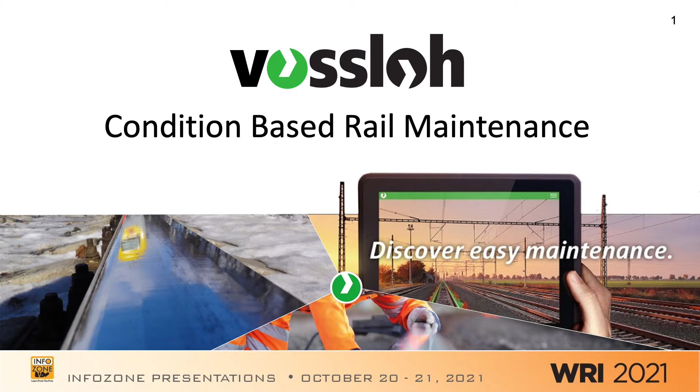When Vossloh presented 2 years ago to the WRI conference, we had some graphics on screen and we talked about the toolbox, the different tools that can be used in different applications and different rail conditions. We are big believers that different tools should be used in different applications. What we have on screen here is very basic. Most people in the room would understand these different technologies through different presentations in the past.

Obviously, the top two, slipstone grinding and conventional grinding, are the ones that have been utilized in North America to the highest degree. When Vossloh goes out on track with any of our operations team or engineers, we like to look at different conditions, and we really think that different tools should be used for different types of rail defects, depending on the track time you might have, the depth of defect, and whether we're trying to remove flaws or just optimize a profile. Different technologies can always be utilized, but they definitely provide different value-add propositions depending on how they're used in different areas.

When we spoke a couple years ago as well, we talked primarily about rail milling. Other companies have made presentations about the different technologies and benefits in other parts of the world that have been widely adopted. We had a game plan to actually roll out milling technology in this market, and in the last 2 years we have been successful in doing so.

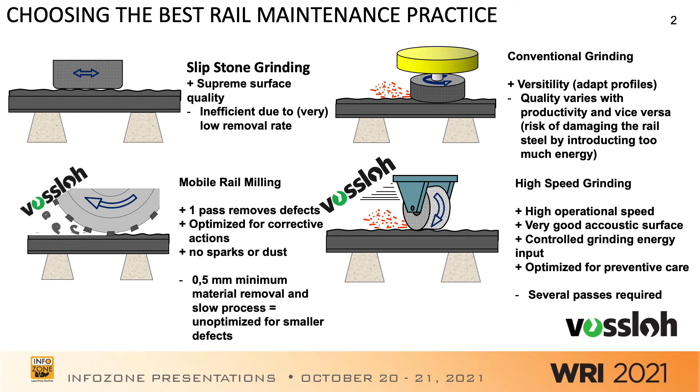What we want to talk about today is we're very aware that conventional grinding has the ability to perform some preventative maintenance. It also has the ability to do some corrective maintenance. We see the place for conventional grinding, but we think there are technologies in the world that add a lot more value when we might want to get ahead of things on a true preventative measure, or in the case of milling, where we actually have defects because we didn't keep up with that maintenance practice, and now we've got to go in and do some corrective action.

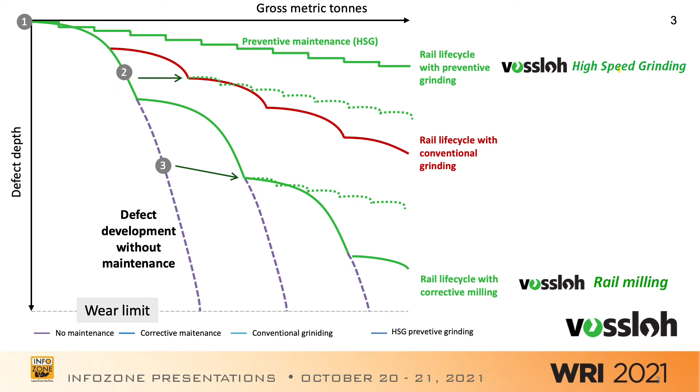We operate about 6 full-size milling trains in other parts of the world, but we recognize that this market has a lot of hotspots, places we can't spark, like bridges and high sensitivity areas. We wanted a solution tailored to this market that would get milling technology in front of people. In due course, we believe larger milling trains with higher output and forward velocity will be adopted on a larger scale. But the solution we've come up with, which we've entered into service in this market, is very adaptable and deployable, and we can move from track to track quite easily.

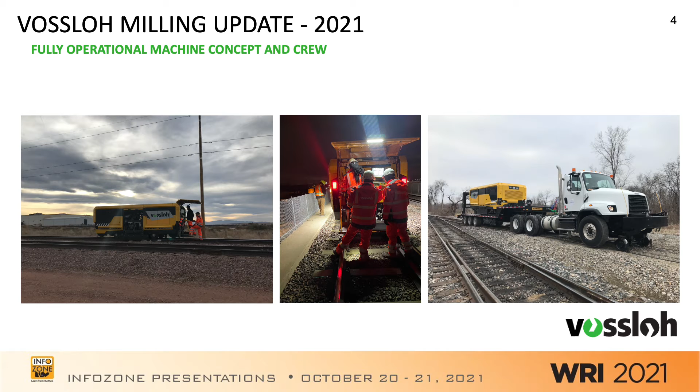So this is actually in service now, and you can see some of the images of what we're dealing with on screen.

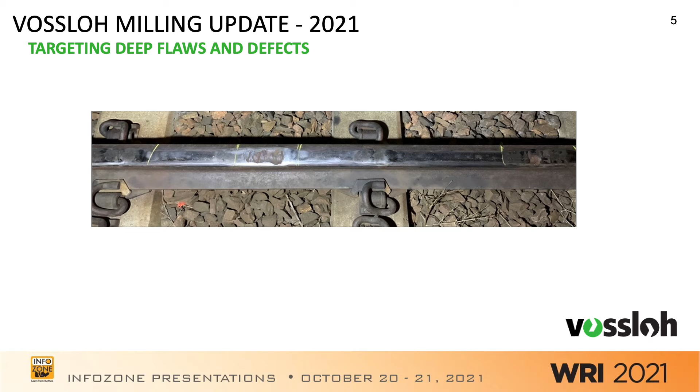I'd like to show you briefly a couple actual examples of the type of rail condition we're seeing in the field. These wheel burns and spalling on the head of the rail just couldn't be addressed with any other maintenance practice, not our own high-speed grinding, not conventional grinding. For depths of this nature, we need something that can do a significant cut depth and restore rail in hopefully one pass.

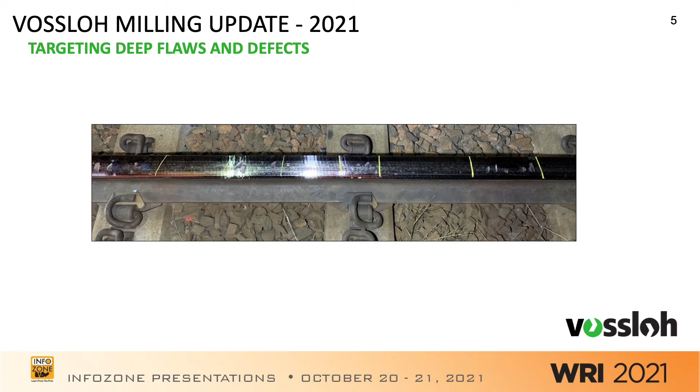In this particular example, we did one pass at a cutting depth of about 2.5 millimeters, and we uncovered defects going even deeper than we had imagined. You can see on screen here that we've uncovered some flaws that were deeper than expected. So after a second pass of milling, we were able to completely remove those defects.

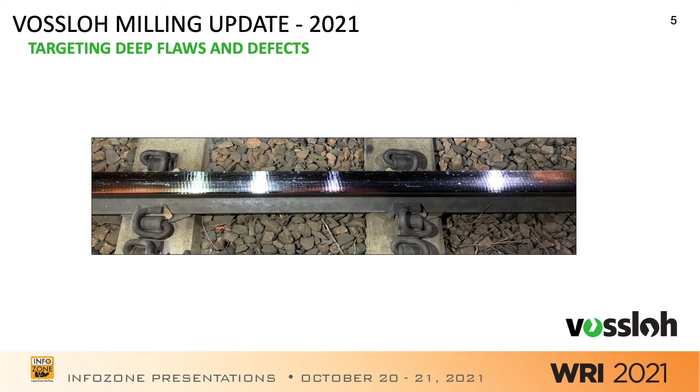What we're faced with quite a bit is when we see these types of things in the field, this rail may have been marked for complete removal and replacement with new rail. We like to think that choosing the right technology lets us do things on a much more cost-effective basis that doesn't need as much track time, labor, or crew, and we can restore rail to get many more years of service life out of it.

We saw some of the pictures on the last slide. A lot of different railroads may mark that for complete rail replacement. We think there's a lot of areas that have trouble getting good test data and readings and can't really understand the depth of those issues, but we still see value in trying to mill those areas out. We've also seen the effect of plastic flow, and we can remove a lot of the plastic flow issues on the gauge side with one pass.

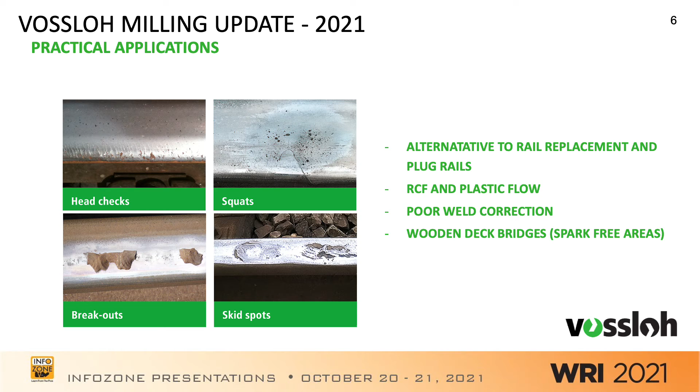We've also come across a lot of areas where welds, whether high or low, cause wheel impacts and the type of issues you're seeing on the left. So the implementation of this technology is growing in the different types of areas we want to see it used, and over time it'll add more value to all of the market.

As we showed in that first graph, we like to take a multi-pronged approach to rail maintenance. As we committed to bringing milling to the market a couple of years ago, and succeeded in getting our unique equipment over here with the VTM Compact we just covered, our next commitment to the market is to help improve on a more preventative attitude toward rail maintenance.

The next piece of equipment we plan on bringing over in 2022 is this HSG City, our high-speed grinding technology. It requires another high rail vehicle to pull it along, and this will allow us to take readings of the track using our smart technology and also start to provide truly preventative rail care to the market.

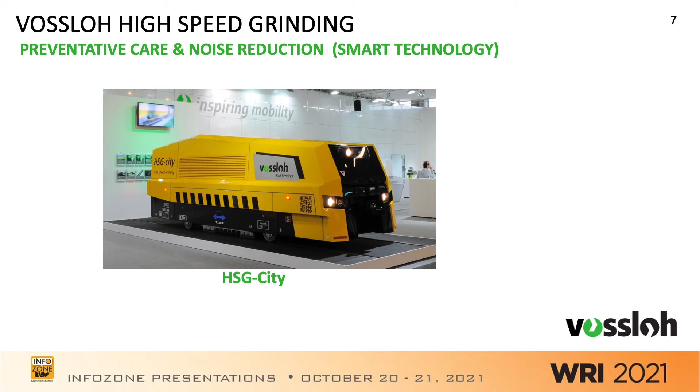We also implement this same technology in our HSG2, which is just a larger scale version of the HSG City. This piece of equipment can also run, just like the HSG City, in between traffic. The working speed is about 30 to 50 miles per hour, and it adds a great benefit where we can implement this in different networks without having to have dedicated maintenance windows.

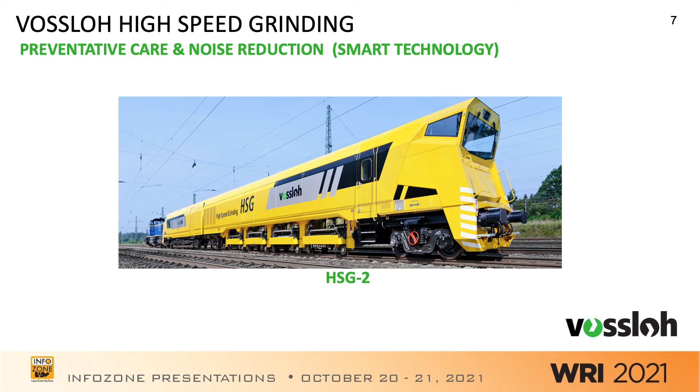One of the benefits we have, in addition to high-speed grinding being truly preventative, is that we can grind at high speed, eliminating very little material as we go by in each pass, but we leave behind a surface condition which hopefully doesn't allow for new issues on the top of the rail to form.

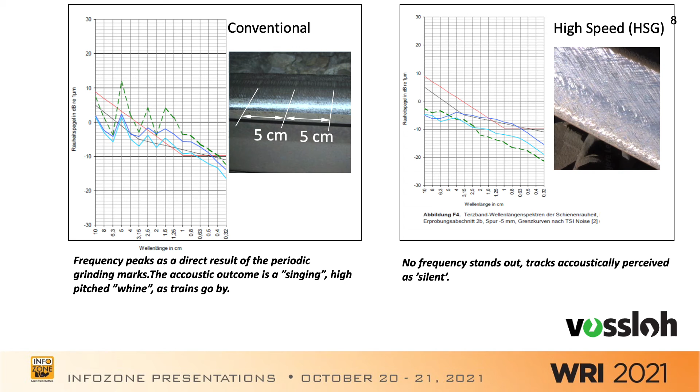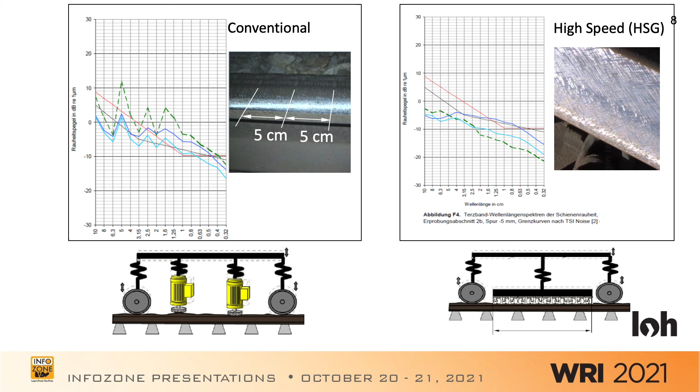We do so by having the grinding wheels on one rigid beam. You can see here on the right that the high-speed grinding method doesn't allow for the fluctuations of each grinding wheel individually. It's mounted on a 1.6 meter beam. All grinding wheels are across that in a rigid nature, so we can't have a frequency less than that 1.6 meters at any given time. This leads to good acoustic performance and lowering all noise coming out of the rail on the track.

Some actual examples are given here. I'll point to them with the laser pointer: a repetitive grinding mark prior to high-speed grinding. High-speed grinding tends to take multiple passes, which isn't an issue since we can run in traffic, so a program would require multiple passes, but we can usually do that within a single shift. After the first pass, the old grinding marks are still there in the middle. After the second pass, they start to be eliminated, and after the third pass, any old conventional grinding marks are gone, and we've left that crisscross pattern in the rail, which helps us not form new issues on the railhead and also improves acoustic quality going forward.

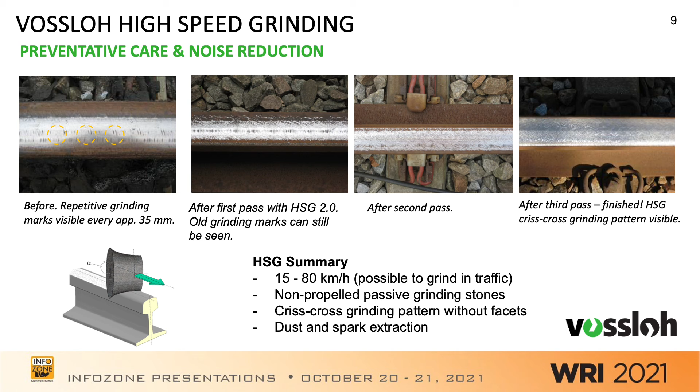This data on screen is a third-party acoustic performance test looking at high-speed grinding versus other methods. We'll be the first to admit that the oscillating slipstone grinder does provide the best performance out of the gate, but economically it doesn't have the performance to be highly chosen in the market. So we compared these differences to 4 different types of conventional grinders from 4 different providers. What you'll see is that high-speed grinding places this pattern into the rail, and because of the fine nature of that pattern, after smoothing, after a week of traffic, the high-speed grinding pattern left behind smooths almost to the same acoustic performance as a slipstone grinder.

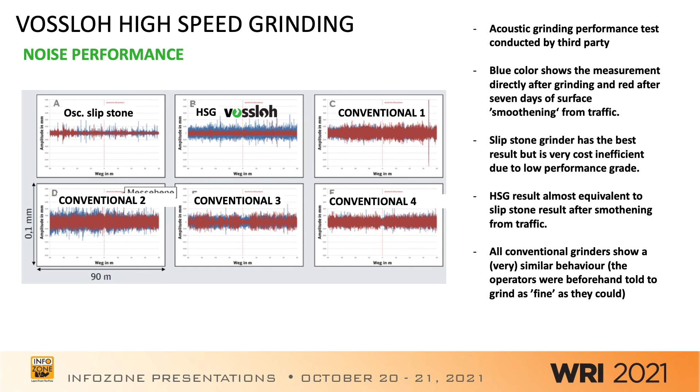One of the next things we're very excited about with high-speed grinding technology is the coverage we get of different networks. With the first HSG City system being introduced in 2022 into the North American market, we plan on equipping it with what we call Vossloh smart technology.

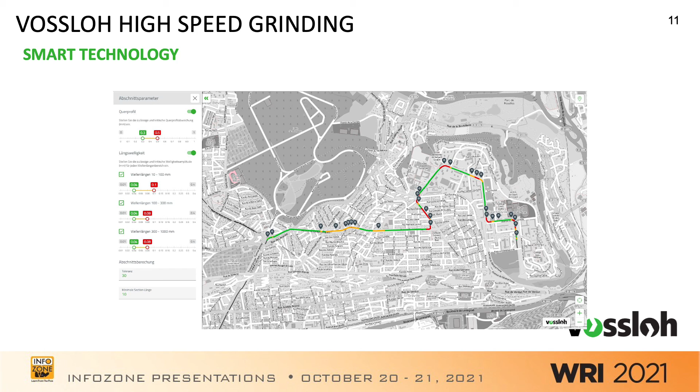This technology allows us to take readings while performing at high speed in order to tailor our grinding program for future passes. Additionally, these readings can help us see where our client should be using conventional grinding methods and where they should be using milling as alternate technologies. So our real-time readings can create a grinding plan like you see on screen right here. We do this with two simple systems, a cross profile system and a longitudinal profile system.

I'm sure everyone is aware of these types of readouts, but we're very excited to implement this into the machine coming into this market, as it will help people understand more about their programs and where we can do more preventative measures, or where we need to come and conduct corrective shifts if we see defects in track that can't be addressed with any type of grinding method, requiring us to provide milling services as an alternate.

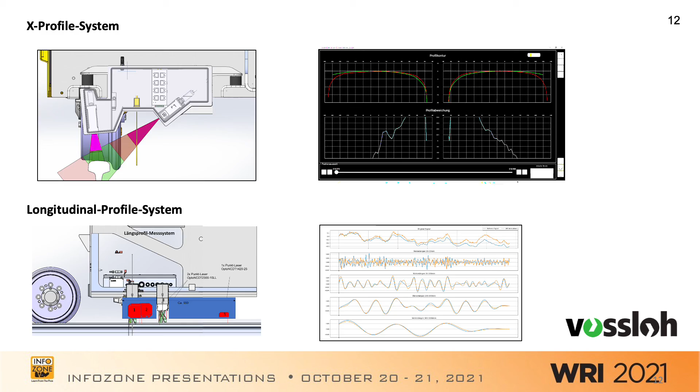Hopefully this presentation gives everyone an update on where we are in the market. As stated earlier, Vossloh truly believes that we should be choosing our maintenance practices based on the rail condition we're faced with, and we believe it's our obligation to continue bringing these different technologies to market so these options can be available. We believe we've had a successful start in launching a practical approach to rail milling in North America. We're committed to bringing our high-speed grinding technology and smart technology to the market in the coming year.